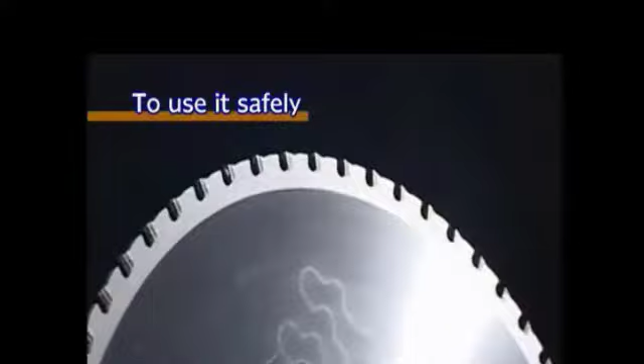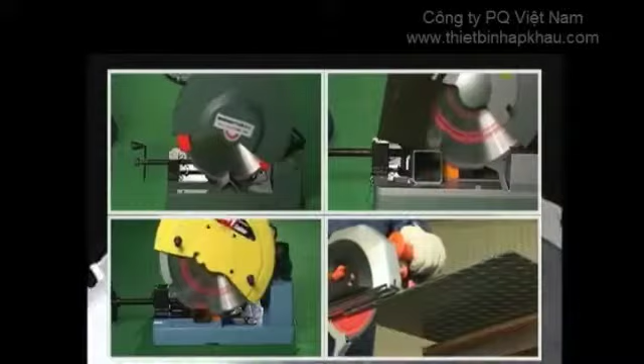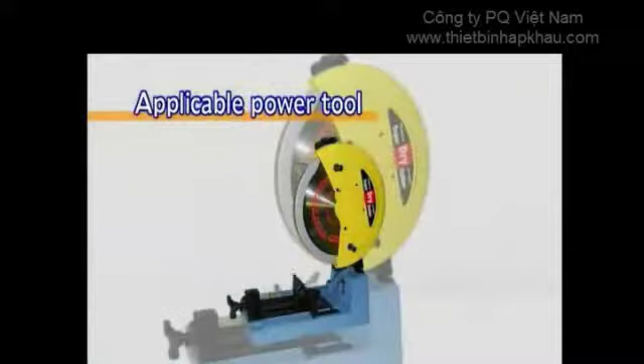And extend its life, please read the saw blade instruction manual and the power tool instruction manual thoroughly. Use the saw blade with applicable machinery that conforms to the outer diameter of the blade and the rotation speed. Power tools specially created for steel cutting saw blades are already produced by several makers.

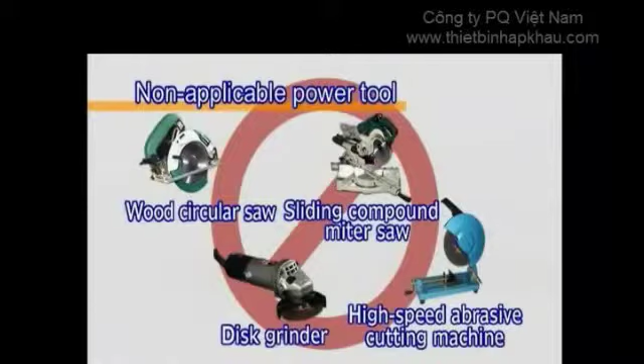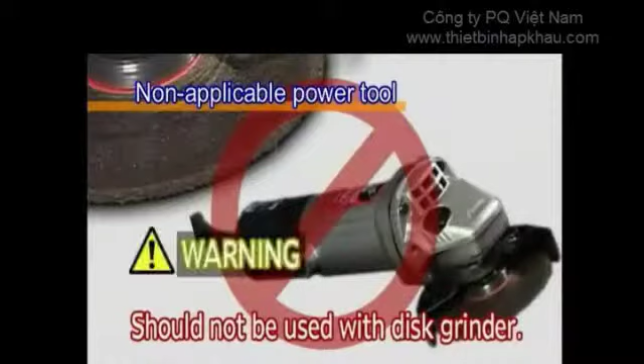The steel cutting saw blade should not be used in disc grinders or high-speed abrasive cutting machines. These machines, in addition to not having adequate rotation speed or output for use with steel cutting saw blades, are not equipped with safety covers or functionalities, and they cannot provide sufficient capabilities. For these reasons, they cannot be used safely.

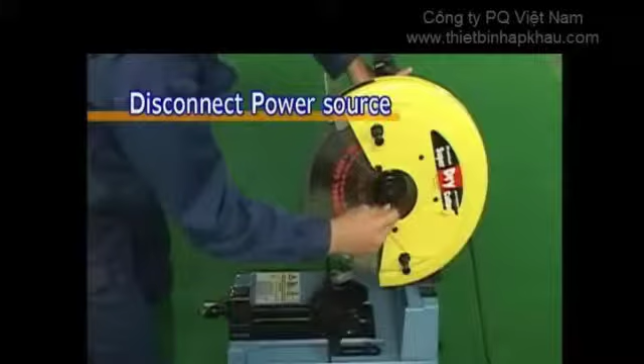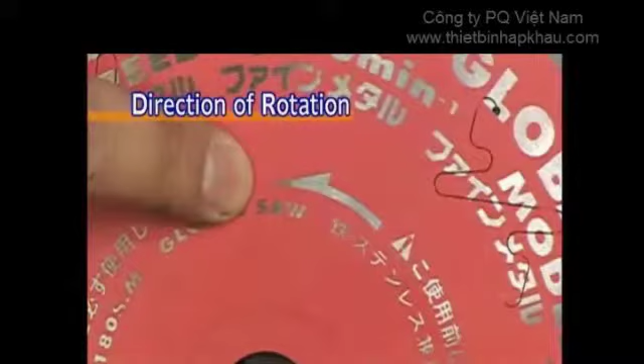When installing or changing a saw blade, always unplug the power tool's power cord from the electrical outlet first. Install the saw blade so that it corresponds to the power tool's direction of rotation, and tighten the flange securely so that it does not come loose.

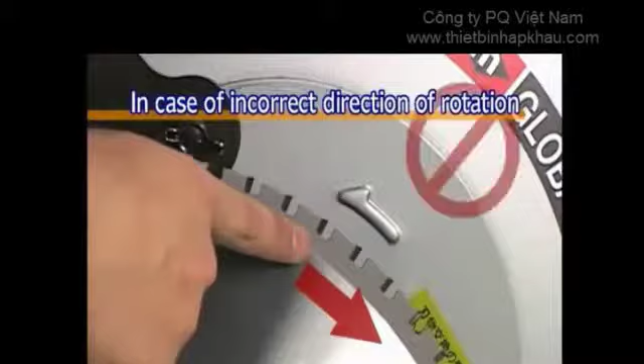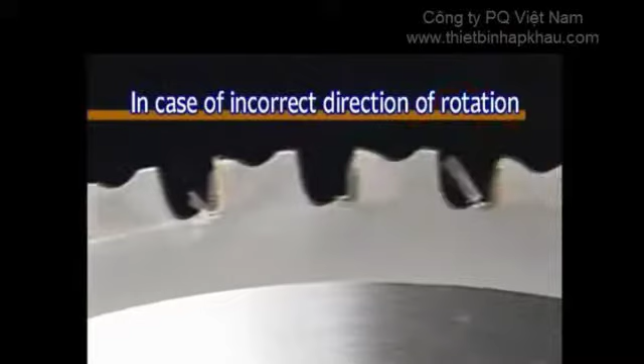When the saw blade has been mistakenly used in the wrong direction of rotation, not only will it fail to cut, but the tips of the blade will all be damaged. Always be sure that the blade is installed in the correct cutting direction. After installing the saw blade, please give it a practice run, making sure that there are no abnormal sounds or unusual vibrations.

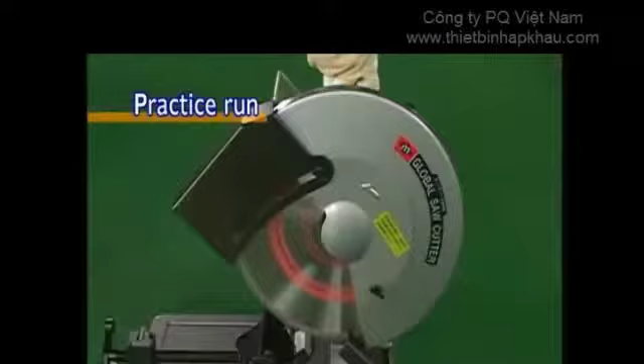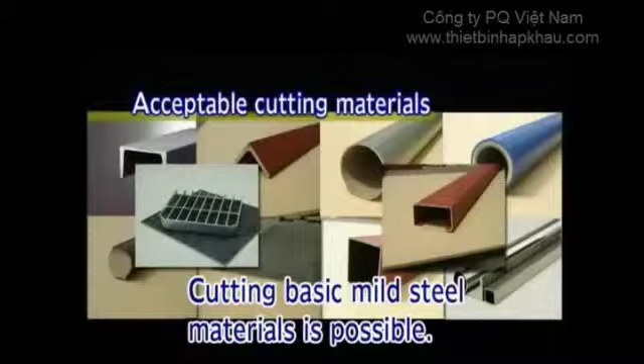For your safety, always wear personal protective equipment. In addition, check your work environment, and do not allow anyone except the operator to approach the equipment while it's in use. The steel cutting saw blade can cut basic mild steel materials. It can also cut composite materials such as wood, plastics, and non-ferrous materials.

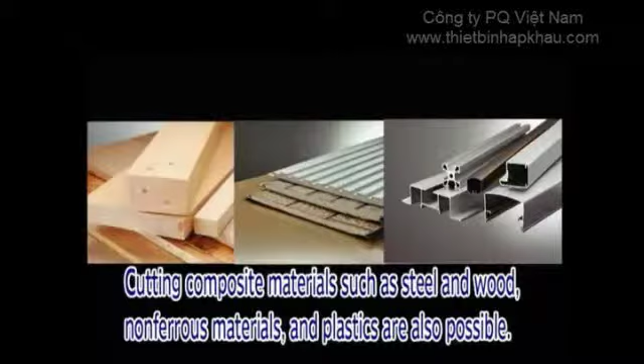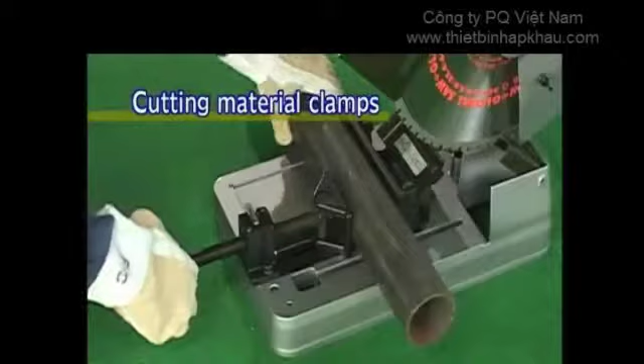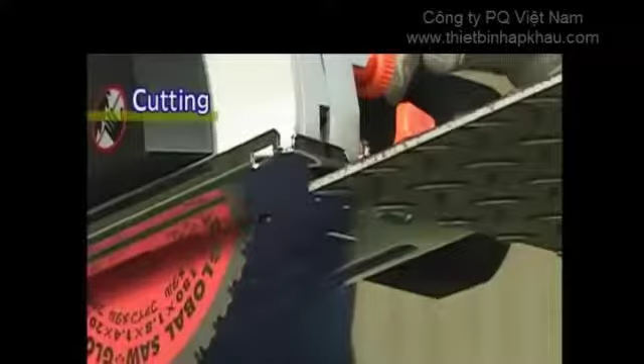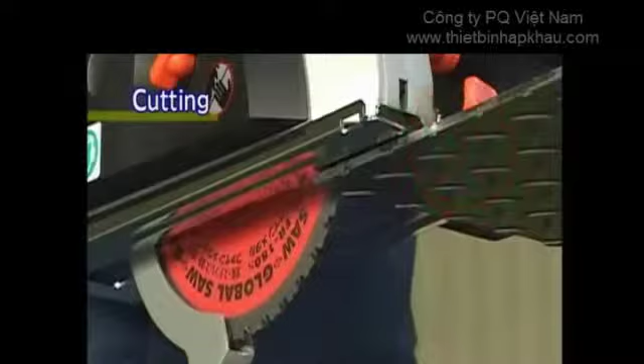Completely secure the cutting material. Please take care while cutting, as the operation of the equipment will become unstable when there is rattling or wobbling, which in turn will damage the tips of the blade and the main body of the saw blade. Begin cutting when the power tool has reached a sufficient rotation speed. There is a high risk of damaging the tips of the blade or the main body when starting the power tool while the saw blade is in contact with the cutting material, or when jarring the cutting feed.

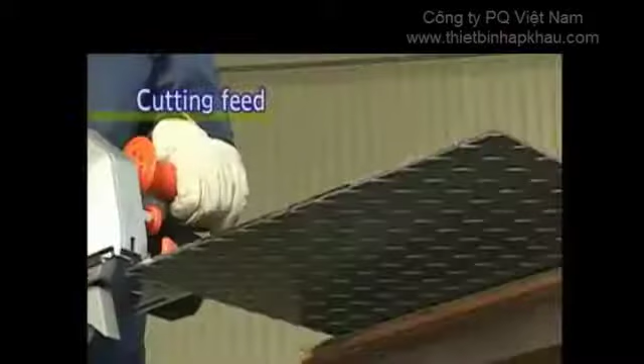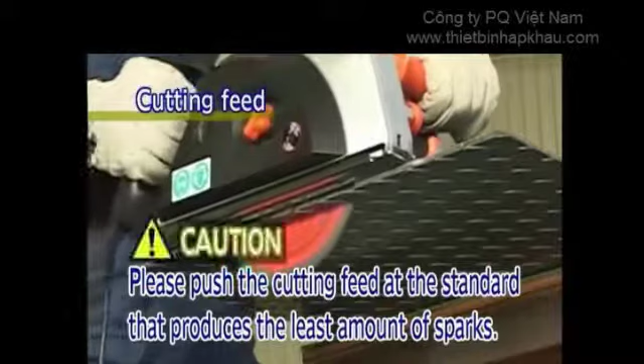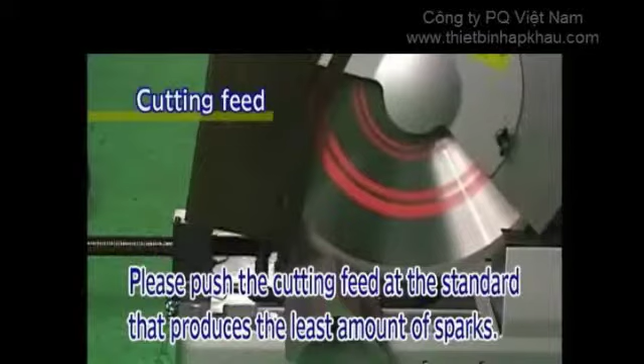Feed slowly until the cutting material begins to cut. Then feed the cutting material at the speed which produces the least amount of sparks. In contrast to a cutoff wheel, there is a minimum of sparks and dust, and the saw blade does not leave burns or burrs on the cutting material. In addition, the external diameter of the saw blade does not grind down, which lengthens operating life and substantially raises operating efficiency.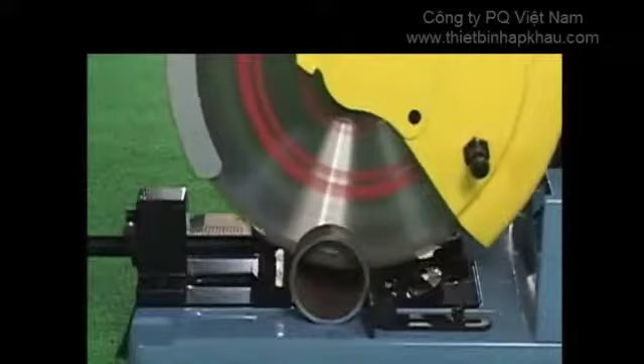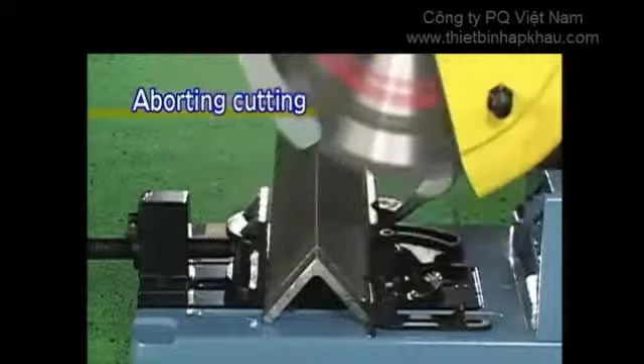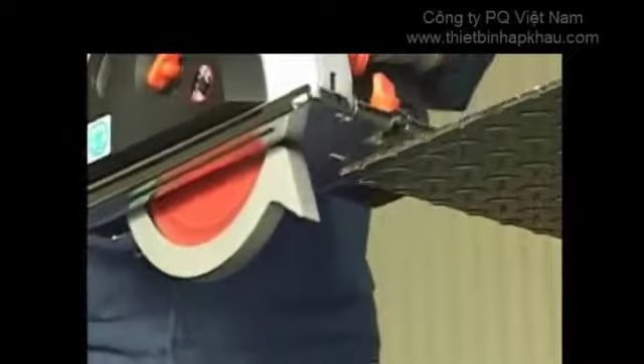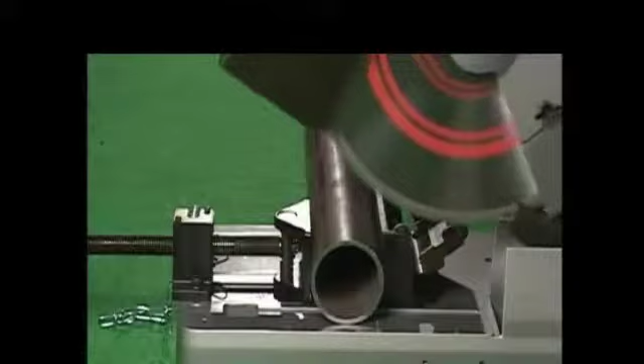In addition, when aborting cutting, please disengage the saw blade from the cutting material while it is still spinning. A super hard alloy is used on the cutting edge of the steel cutting saw blade. Therefore, chips may occur while in use, but this poses no hindrance to cutting. The occurrence of moderate chipping serves as good self-sharpening action of tip wear and maintains sharp edges.

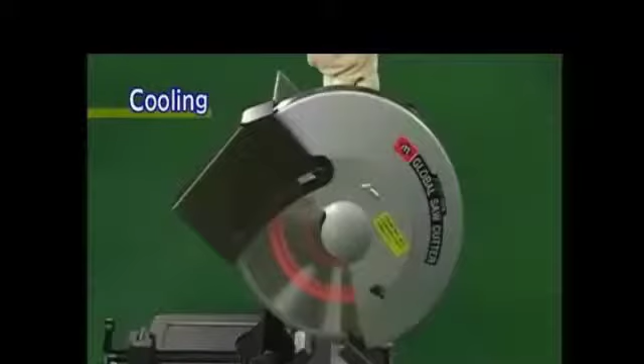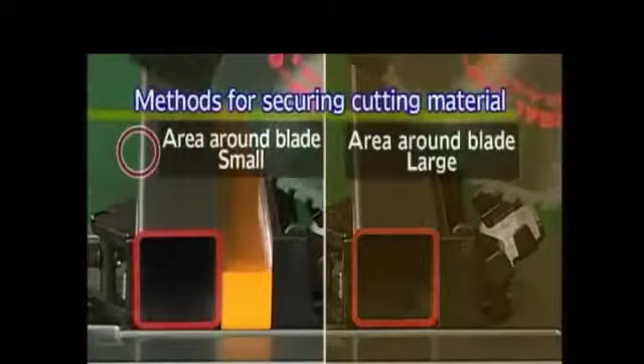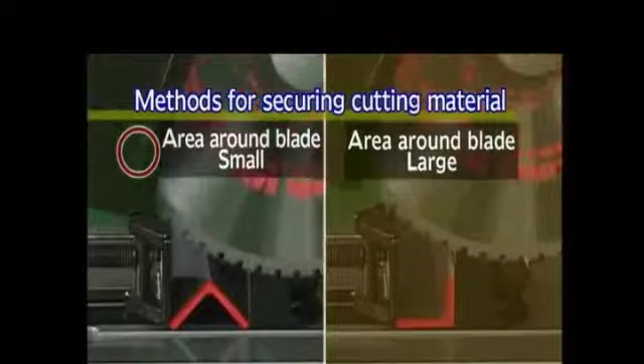Continuous cutting causes the saw blade to reach high temperatures, quickly dulling the edge. So take frequent breaks to allow heat to dissipate. Adjust the method of securing the cutting material as appropriate. Minimizing the area of contact between the saw blade and the cutting material raises cutting efficiency, improves sharpness, and extends operating life.

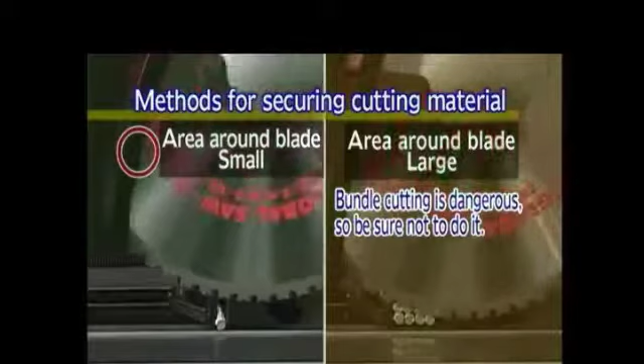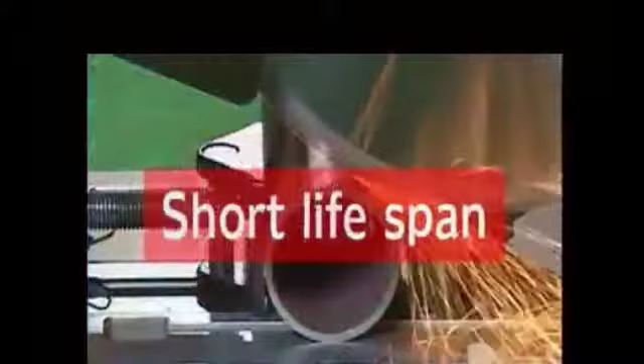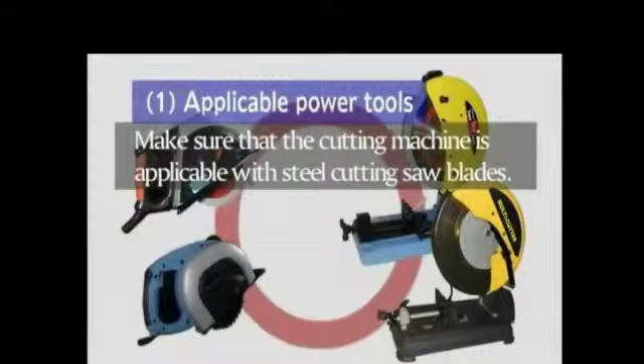Inspect the saw blade prior to each use. Make sure that there is no bending or cracking on the main body of the saw blade, and use your equipment safely. Finally, if the following kinds of problems occur when using the steel cutting saw blade, check the respective points. Short operating life. Applicable to the power tool. Make sure you are using the steel cutting saw blade with an applicable power tool.

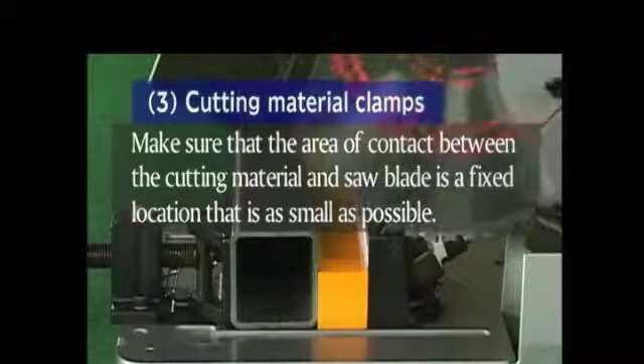Cutting material. Make sure that you are not cutting high carbon steel, special alloys, or any material other than basic mild steel. Cutting material clamps. Make sure that the area of contact between the cutting material and the saw blade is a fixed location that is as small as possible. Cutting feed. Make sure that the cutting is occurring slowly throughout the cutting process.

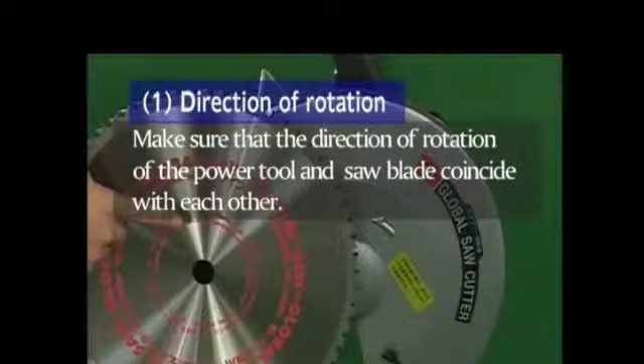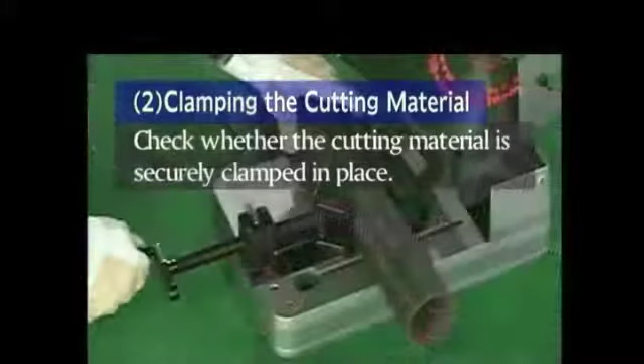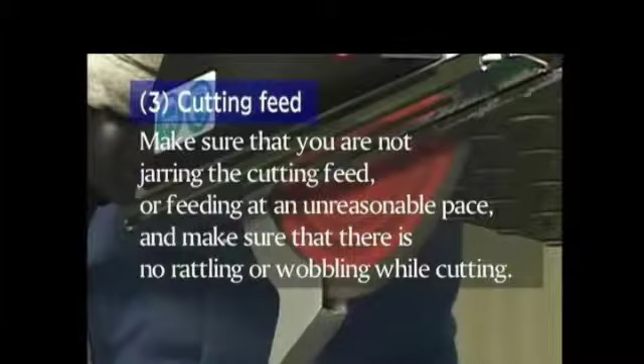The occurrence of chipping. Direction of rotation. Make sure that the direction of rotation of the power tool and saw blade coincide with each other. Clamping the cutting material. Check whether the cutting material is securely clamped in place. Cutting feed. Make sure that you do not jar the cutting feed or feed at an unreasonable pace, and make sure that there is no rattling or wobbling while cutting.

To increase the life of the steel cutting saw blade, as well as to use it safely and to raise the efficiency of your cutting work, be sure to fully understand